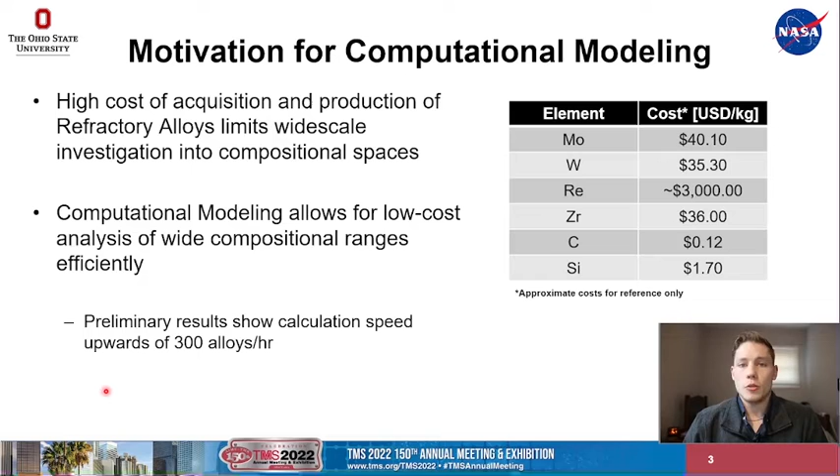We have preliminary results of some of the programs we've been writing where we are calculating around 300 alloys per hour. This speed allows us to brute force calculations over a wide compositional range and analyze all the material properties for each of those compositions. This allows us to really tailor the elements and the ratio of all the elements that are going into these alloys in order to get the best material properties.

Since this is an initial dive into the refractory space using computational modeling, we were primarily focused on zirconium, molybdenum, tungsten, and rhenium as our primary elements, and we also looked at carbon and silicon for other alloying elements. There are other important elements to look at here, but this is where we will be focusing on in today's presentation.

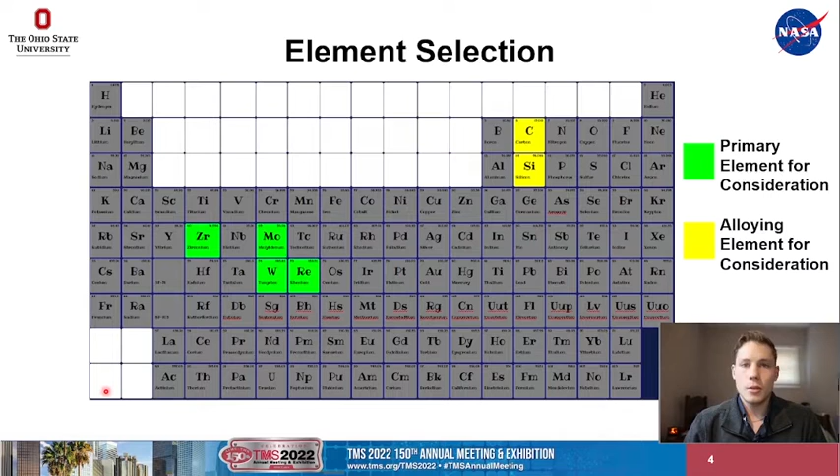So CALPHAD-based software has undergone a lot of development over the past several years, and one development was within the property model that Thermo-Calc uses in order to calculate different material properties. Recent updates have enabled the calculation of several physical characteristics of alloys, including solidification cracking susceptibility coefficient, which is a model that estimates the solidification cracking tendency of a material composition during solidification, as well as a yield strength property, which includes a model for calculating yield stress determined by the total of a combination of strengthening mechanisms, including precipitation, solid solution, grain boundary, etc.

The yield strength can provide information about solid state cracking. We were hoping that it would help us to estimate the ductile brittle transition temperature. But the point of using CALPHAD-based software is that it provides rapid capability that allows us to model and predict thermodynamic and physical properties of novel alloys, as well as characterizing in more detail existing alloys.

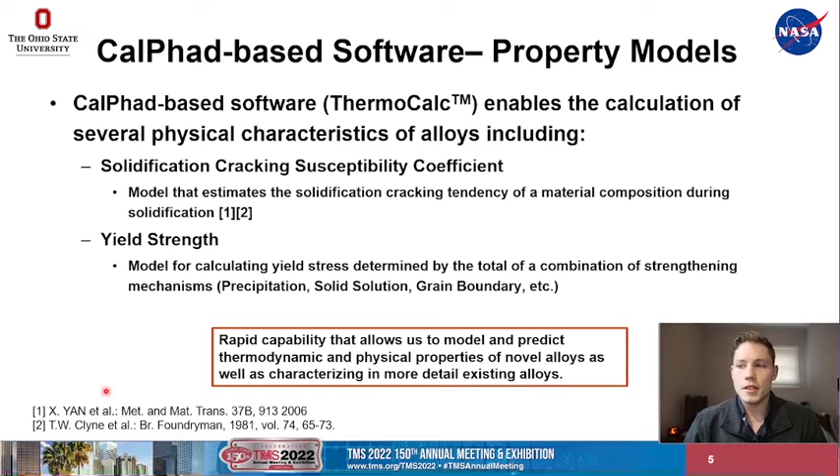We also used Python in order to interface with the thermodynamic software. This enabled us to do high throughput simulations to achieve the calculation speeds that I mentioned earlier, and two of the primary models that we used through Python were the Scheil solidification curves and single equilibrium calculations.

So the Scheil solidification model provides a lot of information that we can use to understand the alloy's solidification under actual processing conditions. A few key parameters that we pull from the Scheil solidification curves include the solidification temperature range, as well as the liquidus and solidus temperatures, solidification sequence, and then an initial look at crack susceptibility. So Kou's model is a common model that has some limited application to crack susceptibility, primarily with aluminum alloys.

And I'll discuss later in the future work section some of the work that we are doing in order to try to adapt this model and make it system agnostic so that it can apply to a broader range of material systems. For the single equilibrium calculations, they can also provide some information on the partition coefficient and the liquidus slope, both of which can help to provide an understanding of how the elements are moving around within the material, which can be helpful when we're looking at solidification cracking.

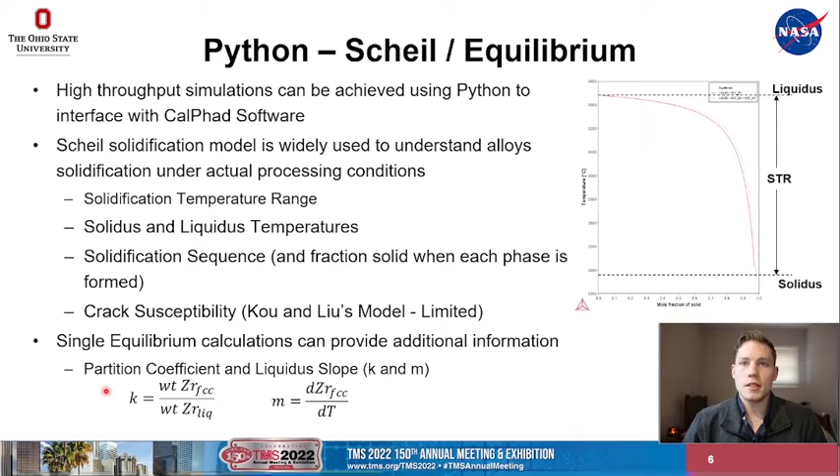To start off with, we wanted to compare CALPHAD calculation of phase diagrams results versus literature results. So on the right here, we have a tungsten rhenium binary phase diagram that was produced through the use of CALPHAD software. And then on the left, we have the literature version of the tungsten rhenium binary phase diagram. As you can see, there was good similarity between these two diagrams, providing confidence that the thermodynamic software is modeling the system well, and the database that we're using as well is very important.

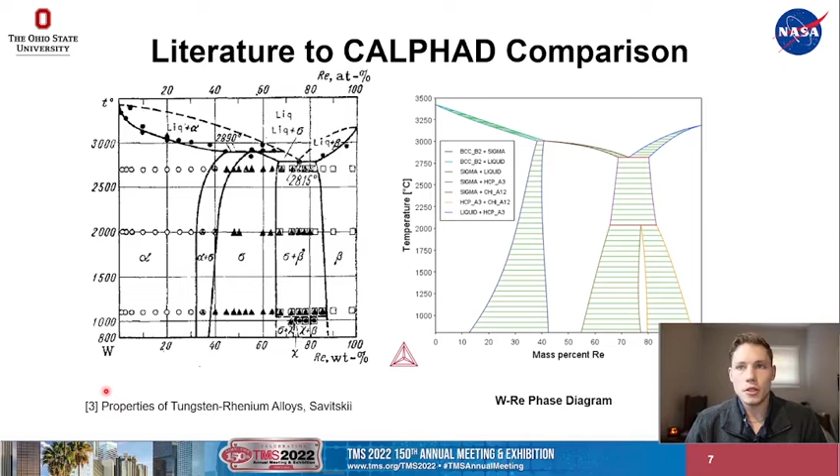So for the solid state cracking, one major issue with the use of refractory alloys is that they tend to have a limited ductility due to the large grain size, grain boundary embrittlement from oxygen, and a ductile brittle transition temperature that is well above room temperature. So if we could calculate where the ductile brittle transition temperature is and alloy it with various elements, or model alloying it with various elements to see which of those elements help reduce the ductile brittle transition temperature and reduce the solid state cracking, that would be beneficial.

Unfortunately, the ductile brittle transition temperature cannot be calculated directly from CALPHAD, so a few other methods were investigated to provide insight into ductility. These were yield strength versus ultimate tensile strength, hardness, and elongation percent using Gibbs and Helmholtz free energy. The yield strength and hardness were two factors that we hoped to get out of CALPHAD, and the elongation percent we calculated using various equations that we found in literature.

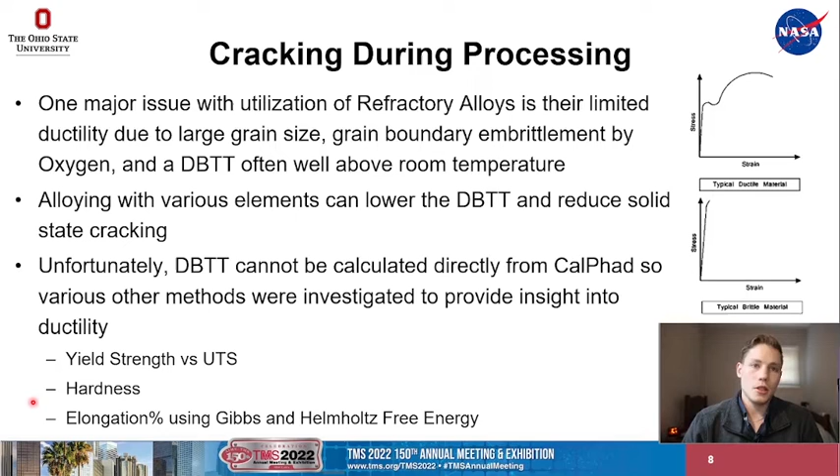Looking at the yield strength, we were expecting to be able to enter a composition and a temperature and get out the yield strength at that temperature. The thermodynamic software that we were using provided the results shown in the figure on the top right, where we have temperature on one axis, the rhenium content on the other axis, so this is a tungsten rhenium binary system, and then the yield strength on the vertical axis.

As you can see from the figure, there is a lot of range of temperature where the same yield strength is predicted. This goes counter to what we expected and what you see in literature, where in the literature graph you can see that with increasing temperature, the yield strength decreases. This makes sense for most materials. And because we were not seeing these results, we had to do a deeper investigation into how the thermodynamic software that we were using was using the inputs that we were giving.

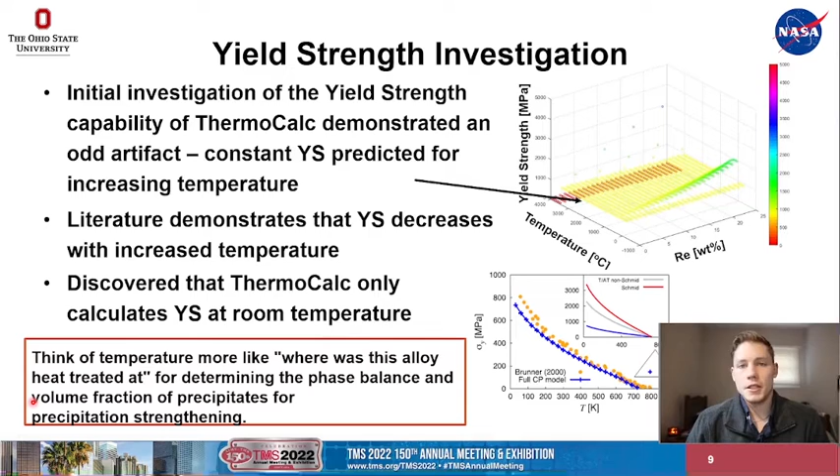So what we found out was that it treated the temperature that we were providing as a heat treatment temperature, essentially, and always provided the yield strength at room temperature. This is a limit of the software and the data that the software uses in order to provide calculations, and it's not something that could be easily overcome. And this meant that we were not going to be able to use yield strength in order to calculate the ductile brittle transition temperature as we hoped.

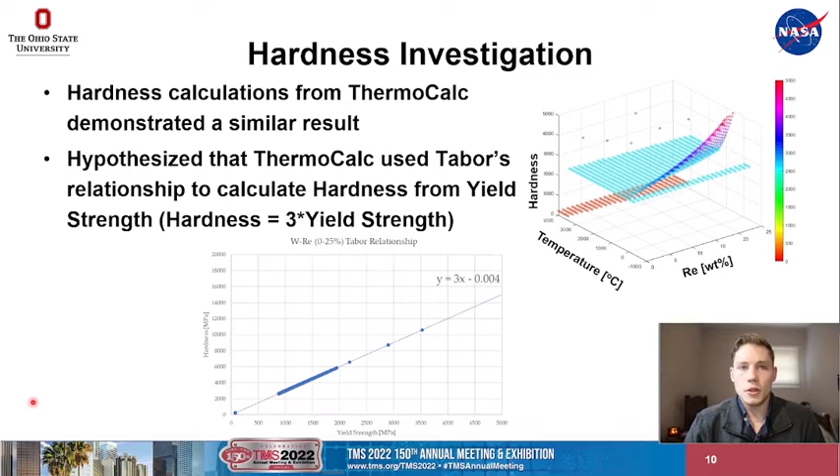We experienced a similar problem when we began to look at hardness using the CALPHAD software. The figure on the right again shows a similar behavior as what we saw with the yield strength, where it has wide ranges of temperature where the same hardness value was predicted. From this, we hypothesized that Thermo-Calc was using Tabor's relationship to calculate the hardness from the yield strength, where hardness is equal to 3 times the yield strength. And when we plotted this, we found that this was the case. So it was calculating hardness in a similar way that it was calculating yield strength, and this did not allow us to gain additional information about where the ductile brittle transition temperature was.

Because of this, we moved on to the solidification cracking susceptibility. So another common issue when processing alloys like refractory alloys using common technologies like welding or additive manufacturing is solidification cracking. And so, as I mentioned earlier, Kou and Liu demonstrated using that model, using the maximum of the derivative of the Scheil curve in order to estimate relative solidification cracking susceptibility. They saw good application for aluminum alloys with limited application beyond those alloys.

Despite this, we use this model in order to run a wide compositional range for a molybdenum zirconium carbon alloy system. And that is what is shown in the heat map on the right side of the screen. This heat map is color indexed by the cracking susceptibility, with zirconium on the x-axis and carbon on the y-axis, with molybdenum as the filler element. We use Python in order to calculate this wide range of compositional space.

And the goal of this is that the map would show you areas of compositional space where you would likely have high solidification cracking susceptibility. This would then be able to inform you in the lab, when you're experimentally producing alloys, of compositional spaces to avoid in order to avoid solidification cracking.

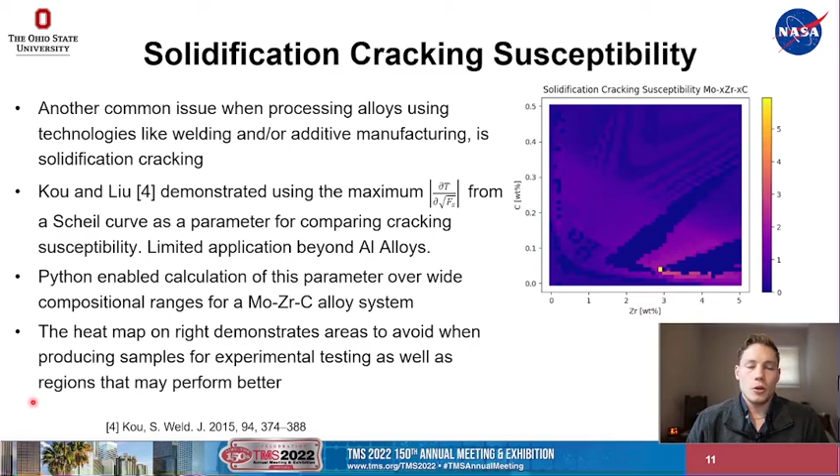Some of the future work that we've been working on in order to expand off of Kou and Liu's model is shown on the slide now. And the goal was to cover a broader spectrum of alloy systems, so they'd be system agnostic. This means that you'd be able to run the same calculation on an aluminum system or a steel system or a refractory alloy system and get out results relaying relative cracking susceptibility.

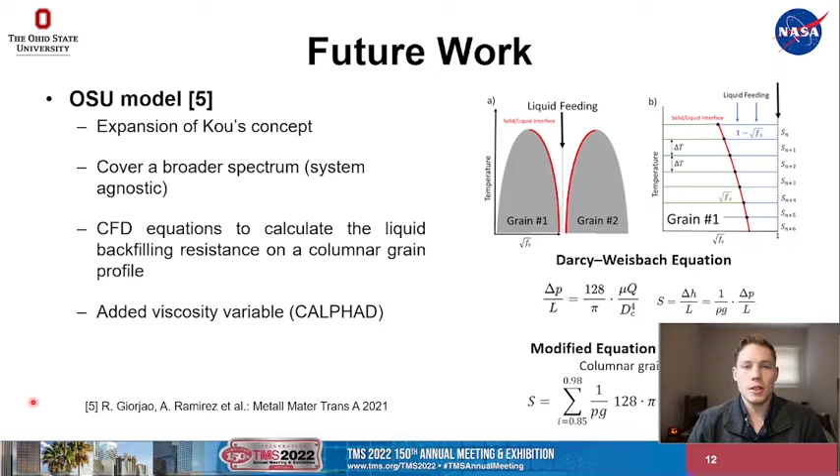So in order to develop this model, we use computational fluid dynamics in order to calculate the liquid backfilling resistance on a columnar grain profile. So in figure A, you can see two grains shown that are growing side by side. In order for these to solidify, liquid has to feed down into the space between the grains, and the resistance of the liquid to flowing down into the grains can relate to solidification cracking. So we added a viscosity variable as well as some other factors from CALPHAD into this equation, which is shown on the bottom right, that we have developed in order to estimate this solidification cracking susceptibility.

On this slide, we show an example demonstrating the advantages of this newly developed solidification cracking index. So this was an erbium modified 7075 aluminum alloy, which both Clyne and Davies index and Kou index modeled incorrectly. You can see in the top right that Clyne and Davies index predicted increased susceptibility with the addition of this element, and Kou's index on the bottom left also indicated increased susceptibility with the addition of this element. On the bottom right, you can see that the newly developed OSU index estimated decreased susceptibility with the addition of this element, which is what was actually seen in experimental results.

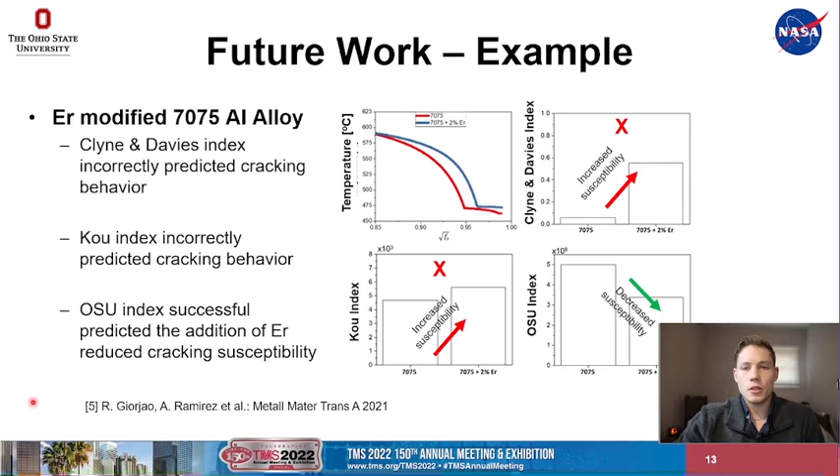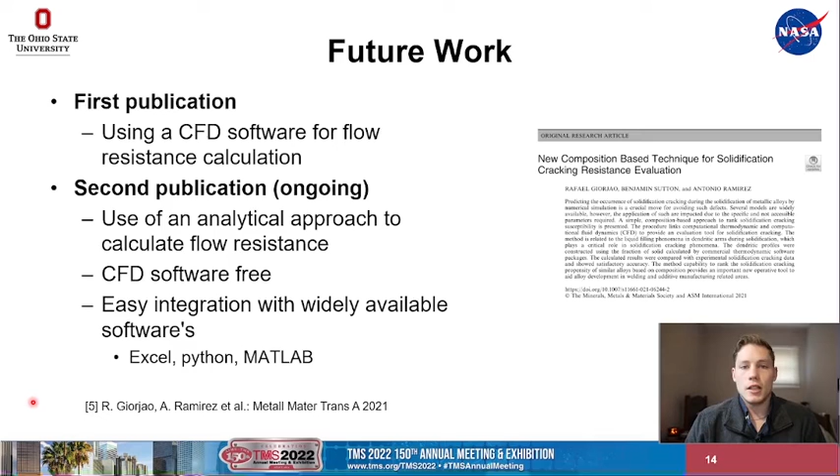This shows some of the benefit of this system in incorporating the computational fluid dynamics. And there are other examples as well that we are working on to show the advantages of this cracking susceptibility index. The first publication of this index is out, and you can find it. It is titled New Composition-Based Technique for Solidification Cracking Resistance Evaluation. And a second publication is ongoing, where we are aiming to make it more accessible. So we're doing that by minimizing the need for computational fluid dynamic software so that it will be easily integrated with Excel, Python, or MATLAB or something like that. So it can match the ease of use of Kou and Liu's model.

Some concluding remarks: computational modeling of alloy systems continues to demonstrate high capability for modeling physical material systems with much greater speed and lower cost. Refinement of refractory alloy spaces provides benefit for specialized flight applications, including nuclear thermal propulsion, green propulsion, and hypersonic flight. And the adaptation of computational models for different compositional spaces, energy inputs, and solidification rates promises rapid alloy development and refinement.